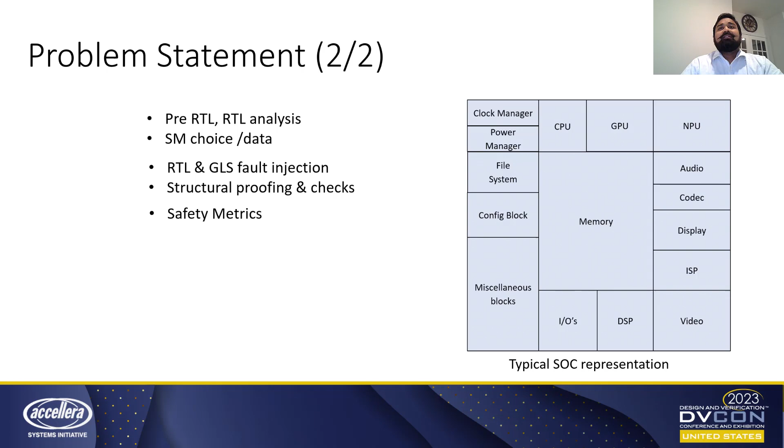To solve this problem, we have divided our proposed solution into three parts. The first portion is called safety analysis. Here we are taking pre-RTL, RTL data, and we can perform a what-if exploration or gap analysis. This analysis tells us what type of safety mechanism would be ideal for the structure that I'm analyzing. And if that structure has some gaps, this analysis can also tell us.

If my IP or the design already has some safety mechanism, then I can do an assessment of that safety mechanism without having to run a full fault campaign. This gives me a very accurate early metric estimation on the choice of safety mechanism that I'm going to go with or any existing safety mechanism.

Then the second problem statement that we have divided is safety verification. Here we can perform RTL or gate level fault injections. One of the major problems for these fault injections has been an optimized fault list. So during the safety analysis with the safety mechanism that we are using, we will already be generating an optimized fault list. This will feed into our fault injection engines automatically and will provide us the fault injection results along with other structural proofing and checks.

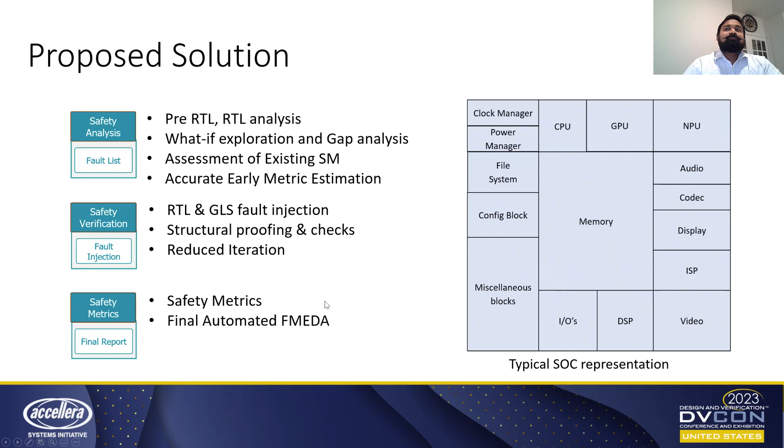Using these three fundamental divisions, we were able to generate an overall safety workflow. So we take our automotive SOC, and in the generate section, we will be analyzing the complete SOC structure. We will be able to generate an optimized fault list with respect to individual failure modes and with respect to individual fault injection engines that we are using in the next step.

We have multiple algorithms and things that are already covered in this generate section. For example, safety aware optimization in the fault list generation, fault collapsing, fault sampling, fault propagation. Everything gets saved into this functional database that we created for the safety workflow. This functional database is automatically read by the fault injection engines, which can be either simulation, emulation, or formal.

And our database is smart enough to feed the simulation based fault list to the simulation engine, emulation based fault list to the fault emulator, and formal based fault list to the formal engine. And these three engines can run independently, mutually exclusive to each other, and then they can save their results into the same database again. Now, this database will automatically merge the results that we have captured from running one or three different fault injections, and then we will be able to calculate a final metric automatically.

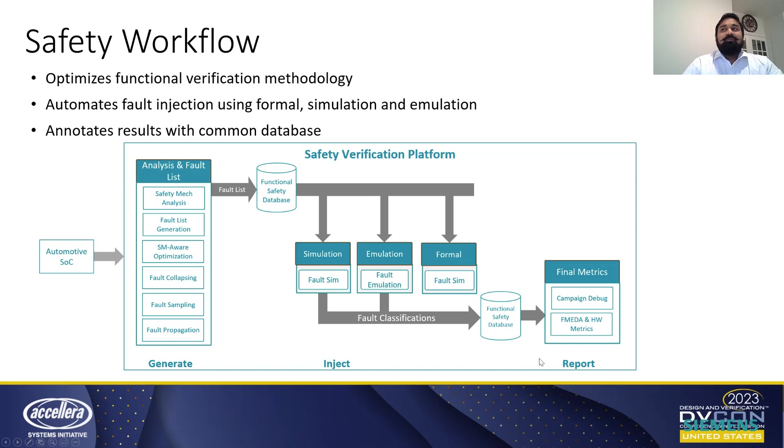So again, we took the same approach of our proposed solution: generate, which is generating an optimized fault list using multiple algorithms that we have at our hand. In the inject, we are automatically injecting those fault lists into their respective engines. And in the report, we are automatically getting the final metric report.

How we are optimizing this workflow: as we discussed, we perform early RTL analysis. We do generate the fault list, which can be optimized for individual fault injection engines. We have capability to generate a safety mechanism or safety aware fault list. We do perform shallow fault collapsing. We will identify all the faults that do not propagate. And of course, we have built-in statistical random sampling and architectural vulnerability factor like algorithms in our engine so that we can get these sampled fault lists ahead of time.

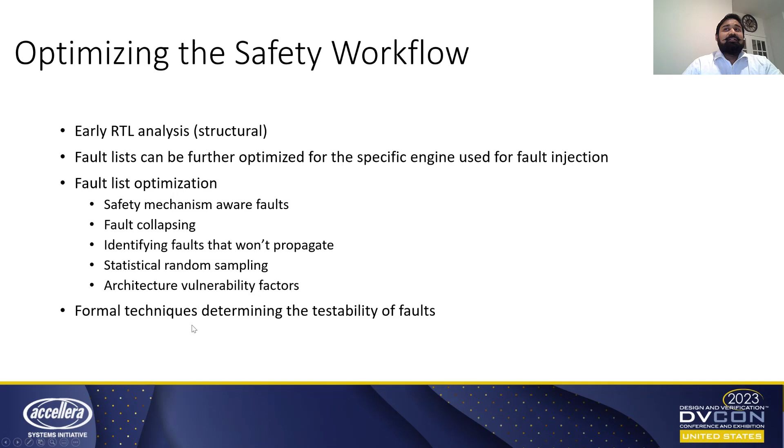And in this early analysis, we are also improving our overall structure by using some formal techniques for determining the testability of the faults. Using the automated fault injection flow, we take this generated fault list and we automatically distribute it into these three engines, which saves back into the database and gets the final metric reports for us. This complete flow is described in ISO 26262, chapter 11, which describes the fault classification at semiconductor level.

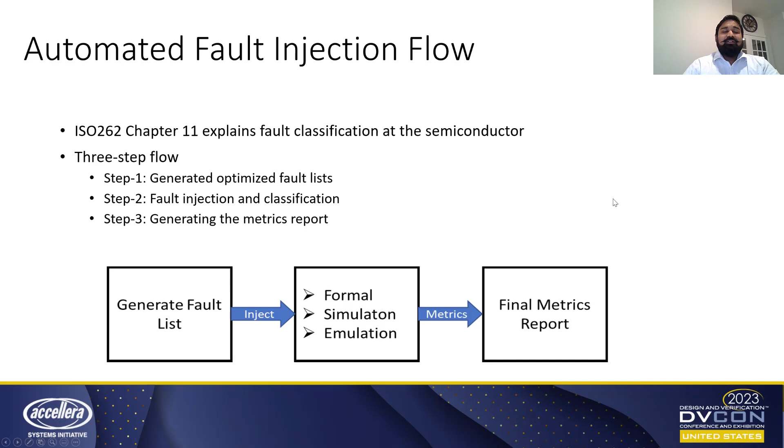So let's discuss safety analysis a little bit more in detail. Under safety analysis, we are taking the RTL data and we are performing the what if analysis. What if analysis or exploration gives us an insight into what will happen if I were to use a custom safety mechanism or a safety mechanism of my choice, what would be the effect of it over the analyzed area or the overall design. And I can get these metrics without having to run the full-blown fault campaign.

This early indication of metrics is very powerful, as it saves a lot of time, engineering time in hand. And this gives me an indication of what type of coverage I'm looking for in my overall SOC, if I were to create these safety mechanisms in my design.

At the same time, while I'm exploring or analyzing the existing safety mechanism, I'm able to generate a fault list which utilizes multiple failure modes, which has the capability of tagging a fault list for simulation or emulation engine. It has direct integration to the validation tool, and I can model multiple failure modes while generating this fault list.

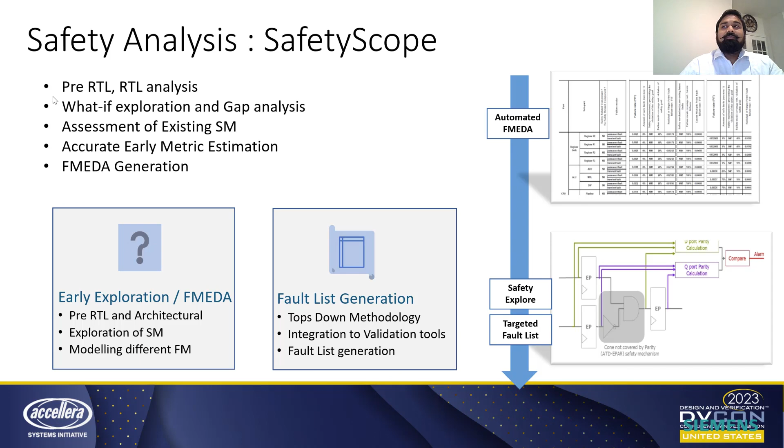Safety verification using Kaleidoscope is our way of doing the fault injection. We use a high performing concurrent and distributed fault injection model for doing the fault injection run. It starts with an optimized fault list, which is of course given to us by safety analysis, and then the fault injection manager for simulation will automatically divide it into multiple parallel and multi-threaded jobs.

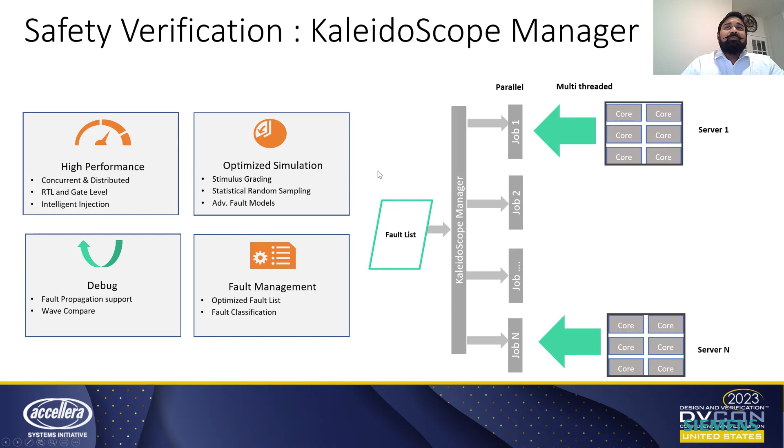At the end of fault simulation, we will get a final detected report, how many faults were able to be detected for stuck at 1, stuck at 0, or both. And based on that, we will be able to calculate a final metric. Now we can use the entire reporting structure for more debug. We can do fault propagation or waveform compares or do debug of non-detected faults. And we should be able to get all that data through this simulation engine.

In safety verification, we also used emulation as a platform to perform fault emulation. And we were able to perform the complete mission mode circuit, safety circuit verification for stuck-at, transient SEUs and bridge faults. We were able to define the overall effectiveness of the safety mechanisms. And this was the second engine that we automatically divided our fault list structure to.

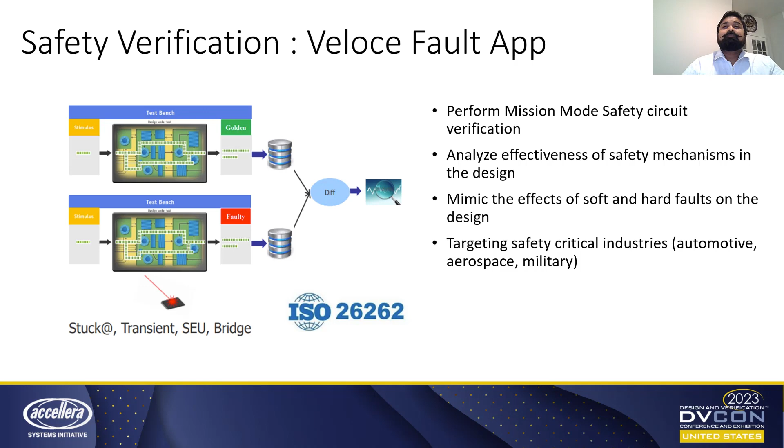To give you more context on this block, the size of the block is around 890K registers, close to 46.5 million gates. Some of the major blocks under this particular safety island are the CPU cache, around 215K registers, bus peripheral, the complete structure, around 470K, and FMU around 33K block.

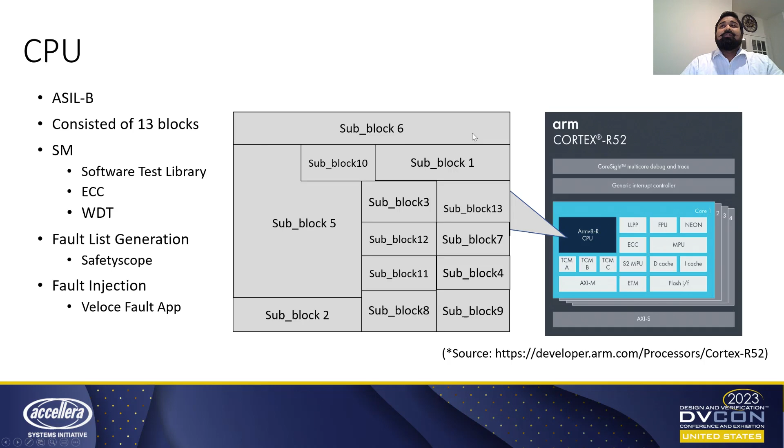R52 block. It has around 13 sub-blocks, and it consists of the software test library, ECC, watchdog timers, and then we were able to generate an overall fault list with respect to these safety mechanisms for all of the blocks, and we used fault emulation for this particular block to do the verification.

So these are our results of fault emulation. You can see that for CPU core and cache divided into 13 sub-blocks, we modeled the overall fault list generation, and then we are showing you results on one sample data. So one random sample pulled out of all the faults, total number of faults that can happen, and we are showing you a result on that sample. Of course, to completely verify, we have done multiple samples based on the ISO 26262 spec, but this particular data that you see is for one sample.

So what you see here is that, for example, on sub-block 1, we had around 85,000 faults. The overall fault distribution in the random sample was around 13%. For example, for sub-block 1, there are 85,000 faults that can happen in sub-block 1, which represents a 13.5 fault distribution out of the total number of faults, which is around 636K.

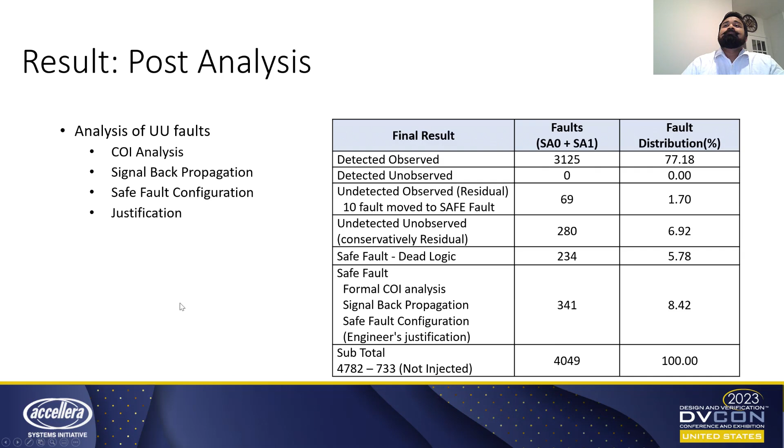At the very end, as a result, we were able to calculate the overall final metrics for the CPU block with respect to all the samples that we analyzed and performed verification on. Our overall DC permanent is 91.38% with a margin of error of plus minus 1.29%. Keeping the conservative margin of error on the negative side, we still are above 90%, which was our initial target to be ASIL-B for the CPU subblock.

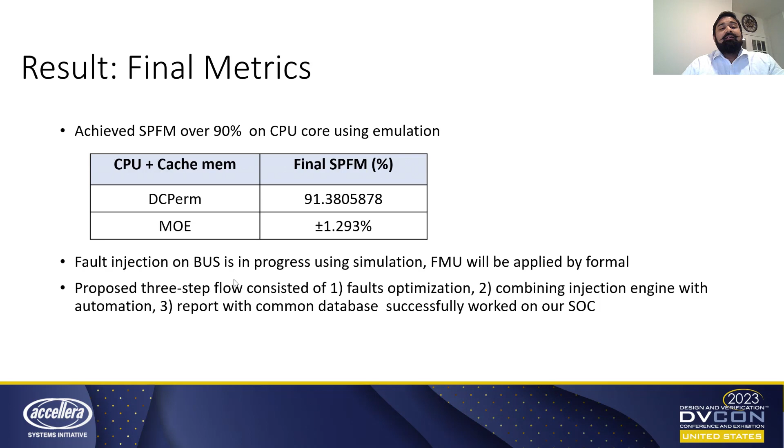Now, the fault injection of the bus is still in progress. We have not finally concluded on that simulation, so those results are still work in progress and will be part of our future work. The FMU block, the fault management unit, will be verified using formal technologies. So our overall result consisted of a three step flow: the fault optimization technique, combining the fault injection engines with automation, and reporting the final metrics using the same database, which is reading the injection reports.

As a conclusion, I would like to describe that this comprehensive approach of verifying such a large scale IP with just one fault injection engine is non-practical. We will not be able to get that result if we were to use only one fault injection engine. For a design like the system on chip test case that we showed here, it is recommended to use multiple fault injection engines, the optimizing technique that we talked about, and automation around those optimization techniques to significantly reduce the time complexity and the error that can happen in manually feeding in codes.

We closely worked with the product team and the methodology teams, with Siemens EDA and Samsung. And this type of collaboration is very, very crucial for a project this size, and for coming up with an overall optimized workflow. Without each other's help, these types of methodology and overall safety workflow are not possible. Conducting safety analysis before the fault injection is absolutely crucial. It saves a lot of time, and therefore, as a final conclusion, we were able to demonstrate how to optimize your fault generation, and then how to involve your multiple fault injection engines by using a common database to give you the overall enhancements and optimizations that are needed for a project of this scale.